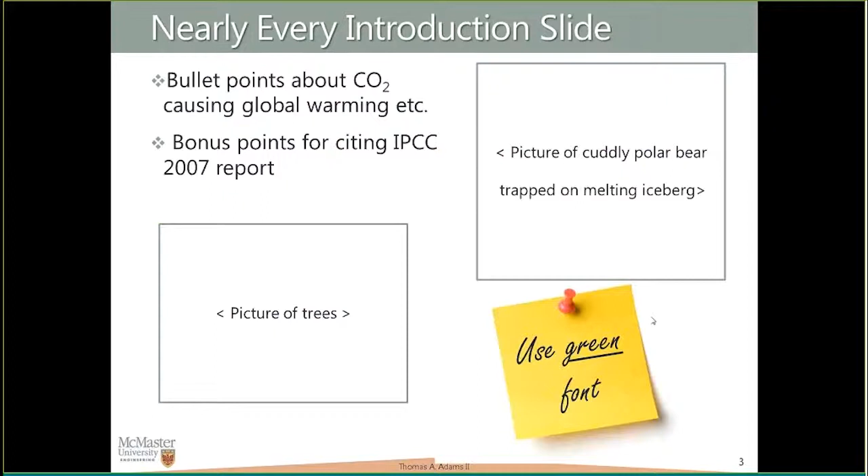Great. Okay, so I'll skip the about me slide and go on to my generic introduction slide. Nearly every introduction slide for a talk of this type has bullet points about CO2 causing global warming, pictures of cuddly polar bears, pictures of trees, that kind of thing, with bonus points for citing the Intergovernmental Panel on Climate Change reports. I'll skip this part because it's pretty well known, and move on to something more local in terms of motivation.

That's what I call the Toronto problem. This basically illustrates the major societal problem we have with clean energy: people want it, but they don't want to pay for it. Either it's too inconvenient or too expensive.

Here's an example. In the Greater Toronto Area, we're growing rapidly and we need power due to growth, and also due to the aging of our power fleets. People say if we're going to do anything new, it's got to be green, and we want green power anyway. We actually have legislation and regulations, and essentially all of our coal power in the province is slated to shut down in 2014.

It's almost 40% of Canada's coal supply that would be shut down as a result of this, if it happens. That's the plan. We're all paying a higher tax right now to cover that cost. And they say, instead of that, we're going to do wind power. So there's a push to get more wind in the province to replace this coal.

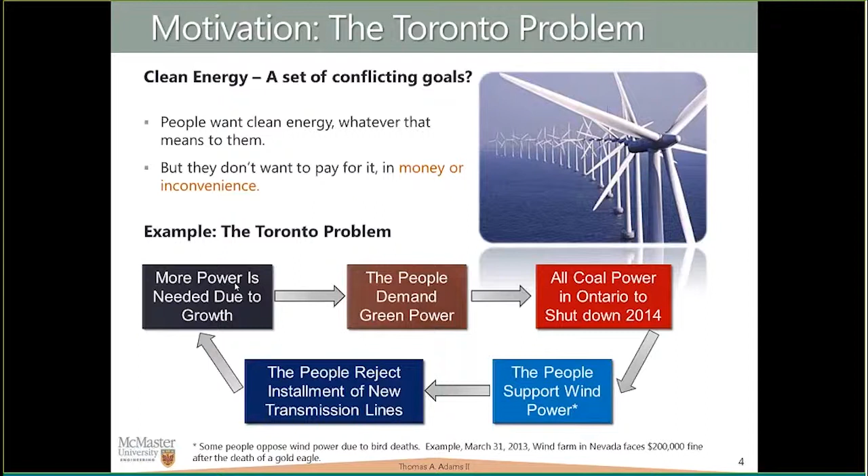But even though people supported the wind turbines themselves, they rejected the transmission lines, because for wind power you need lots and lots of transmission lines. If you've ever been around here, there are transmission lines everywhere and people are sick of looking at them. So we're actually right back to where we started, with nothing to go on in terms of growth. This is just a great example of the problems we're facing.

We put this in the context of what we call the triple bottom line of sustainability. In my group, we try to look at the energy crisis from a systems perspective in the context of the triple bottom line of sustainability.

That means we want things to be sustainable in the sense that it's affordable, so it fits in the economics category, which includes job creation, profitability, uncertainty, and risk. It also actually has to be environmentally friendly in quantifiable ways: particulates, land use, water, and of course global warming and smog and that sort of stuff.

The third aspect is society, which is equally important, if not more important, to getting something actually done: basically public acceptance, NIMBYs—not in my backyard—people that support something but just not where they are, and that sort of thing. So it has to fit in: it has to make sense from a business perspective, it has to actually be environmentally friendly, and people have to be okay with it. And that's a real problem.

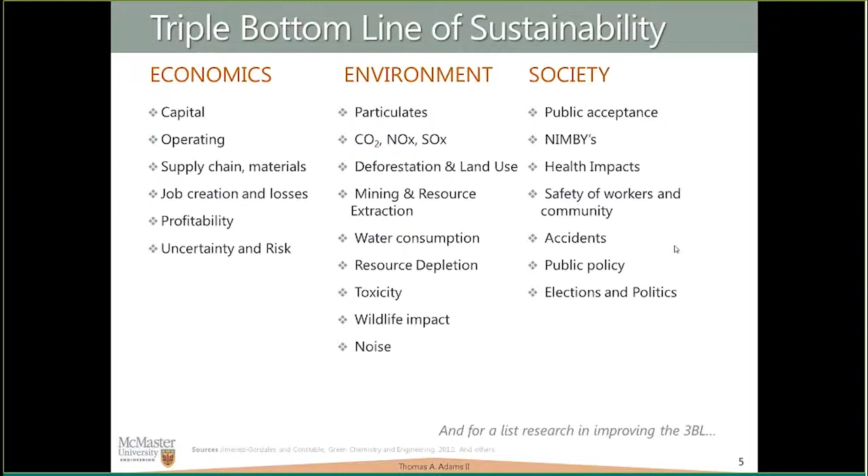Fundamentally, this presentation is going to talk about certain enabling technologies—technologies that I think are going to really change the way we do things from an energy systems perspective. These are technologies that enable new things we're not doing right now, and how that is going to help us solve this problem, satisfying all three tiers.

So the first technology I'm going to talk about is solid oxide fuel cells. For those of you not familiar, this is not like a fuel cell you're used to thinking about for a car or something like that. It's a very different kind of fuel cell.

Essentially, you have fuel going into an anode, and this can be quite a large number of fuels: syngas, hydrogen, methane, natural gas, all that stuff. And then we have air in the cathode. Basically, the way this works is that they're separated by a solid oxide electrolyte conductor.

So basically you have oxygen ions, and you have a free electron coming through your cycle, through your system. It basically hits the oxygen in the air, and that splits into oxygen ions. And these are conducted through. It's solid state, so it's more like electrons in a wire than it is diffusion, right?

So what ends up happening is the oxygen passes through, but none of the other materials goes in either direction, if it's properly made. And then when this reacts with our fuel, depending on the kind of fuel, you get your waste product, and the electrons are released. But now they have a higher energy potential. So that's basically the energy content now is in that electron, that goes to your load, and that drives your circuit.

One of the reasons these are special, I mean, that's a different way of a fuel cell working, but there's some key characteristics which really make it an enabling technology. So one, it's potentially up to high pressure, so these are in development up to 10 to 20 bar. It itself is about 50 to 60% efficient, which is good, but that's just one part of a system, so that's even better when you think of it that way.

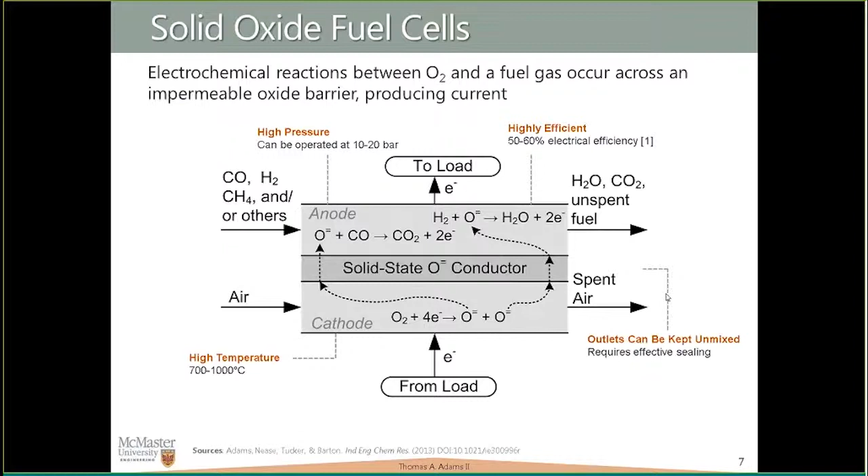So here's an example of, sort of a long-term, maybe 20 or 30 years down the road, way of doing bulk power from natural gas. Instead of combustion, we're going to use like an SOFC system. So these would be banks of stacks of cells, many cells. Your natural gas comes in your anode side, air goes in your cathode side.

And what's interesting is, depending on how you do this, 50 to 80% of the fuel gets used. What you're left with is your exhaust product, which is CO2 and water, and then your unspent fuel. So then you can do an oxidation step, which would require air separation or some other means. But the higher you go here in your fuel utilization, the lower you need here. But essentially, you complete the fuel for heat, and what you're left with is just water and CO2.

So you can recover this waste heat in the heat exchanger network. Here I'm showing municipal hot water, but it's hot enough you can use steam generation for more power if you want. And then the CO2 and water is relatively easy to separate, you can just use condensation in flash drums to get the CO2 out and the water out separately. Your airstream never mixes, so nitrogen never gets in and mixes with your carbon, and that makes it way, way easier to handle from a CO2 perspective.

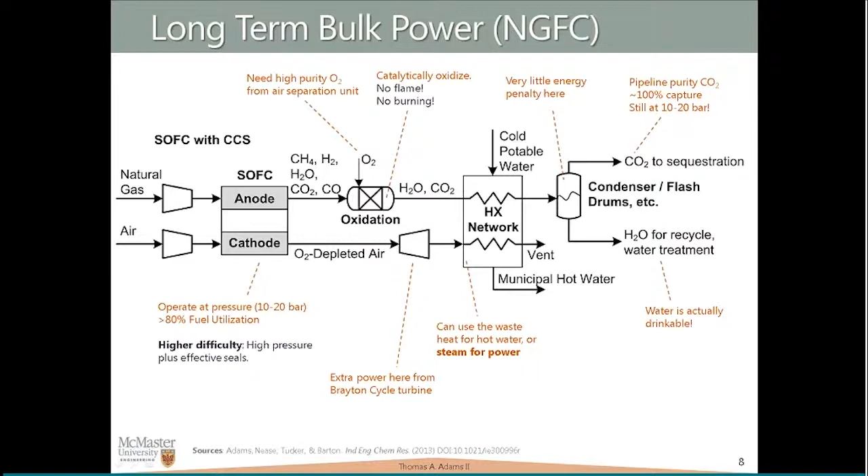So some of the key things here: very little energy penalty for doing the CO2 separation. You can get CO2 at about 100% capture at high pressure. The water you get is actually drinkable, there are people I've talked to that have drunk it. I wouldn't do it personally, but on the space shuttle they used a fuel cell, at least at one time, to produce water and energy at the same time. And you get extra power from your waste heat, so there's all sorts of places you can produce electricity. A lot of interesting advantages here.

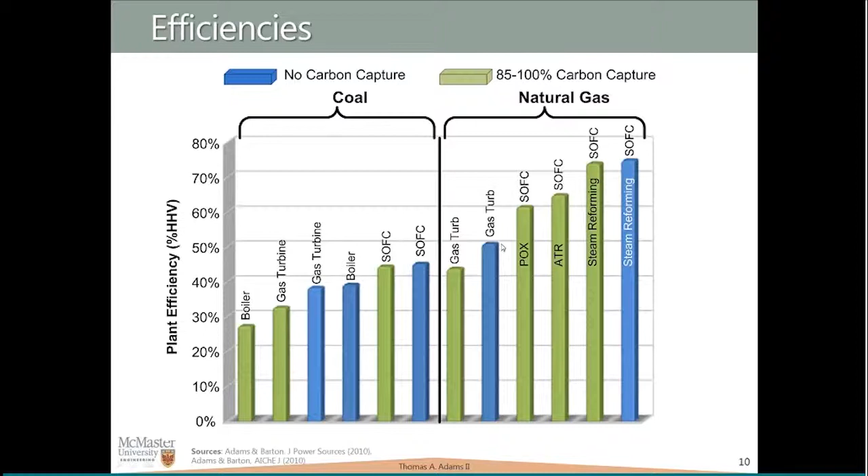On the natural gas side, here's your natural gas combined cycle, and these are different forms of reforming—I mentioned we looked at different types. But all the way up to looking at 73, 74% efficiency. That is phenomenal. The state of the art is about 50%. So that's some really incredible results from the efficiency perspective.

From CO2, here we're looking at CO2 emissions in megatons per year for a 700 megawatt plant. Here's your pulverized coal—when you add capture, even if you get 90% capture, your emissions only reduce by 80%. That's because you need additional coal to make up for the parasitic power required to do the capture. So even if you capture 90%, you have to burn more coal just to account for that.

But with your fuel cell system, even without capture, it's still 15–20% better just from the efficiency, and we can go down to basically zero emissions. Same thing for gas as well. So that's what's really, really neat.

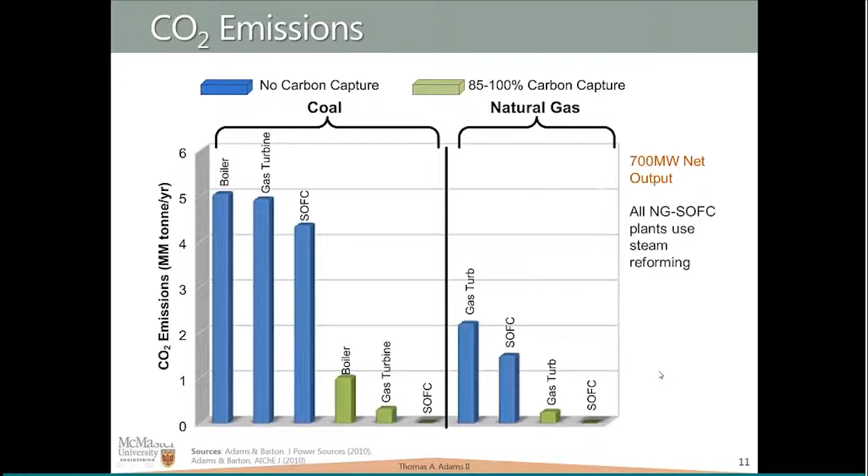There's a lot more to the environment than just global warming that we need to consider. Because we're capturing water at high purity, we actually have a net water production when we do carbon capture, since we capture water as a product and it's ultra high purity. When the systems are designed, you look at the impurities, and they're basically the same as on a bottle of Dasani's—I kept that on my desk as comparison when I was doing these studies.

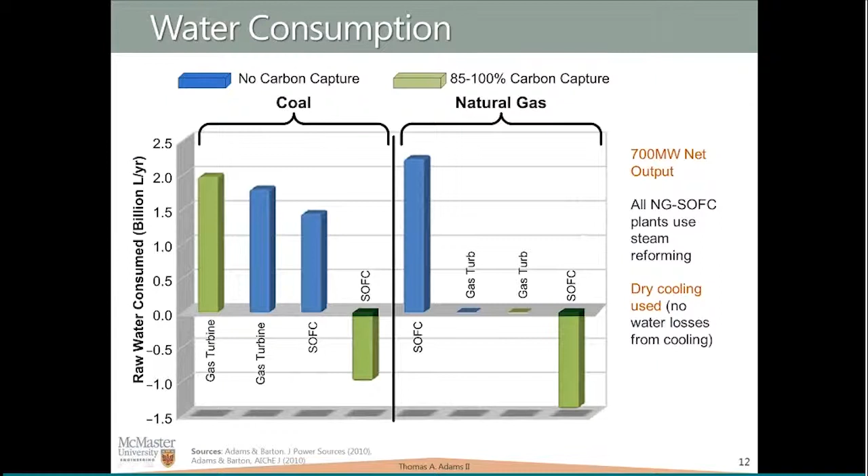In this case we're using dry cooling, so there's more water consumption if we're using wet cooling. We have the potential though to actually produce water from our fuel, without any significant additional effort in this case.

From a systems perspective, we're starting to look at some advanced integrated systems. One problem with the fuel cell-based system is it's basically a steady-state system, and some people are working on getting them to work in a load-following setting, but for the most part they're intended for steady-state baseline use.

So what we're trying to do is integrate energy storage so we can make it follow peaks and troughs during an actual power demand cycle.

We're looking at compressed air energy storage. This is the idea where you take air, and when you have extra power than you need, you compress it and store it in the ground, then pull it back out as needed to spin turbines and generate additional power. It's really fast—7 to 10 minute startup—so you can match real-time loads very closely with this system.

It's nice—a couple are in operation. There's one more that was just announced last month to be constructed in Texas. So this is up and coming.

What's interesting is for the SOFC, the reason we've chosen this is because we already have compressed air—spent air—as a waste product. So this is what we're going to store. Instead of taking fresh air and extra power to compress it, we can use our already compressed air as a waste product. We need some additional power to compress it higher, but most of the work's already been done.

And that's really, really nice because that's an extra layer of synergy between the two.

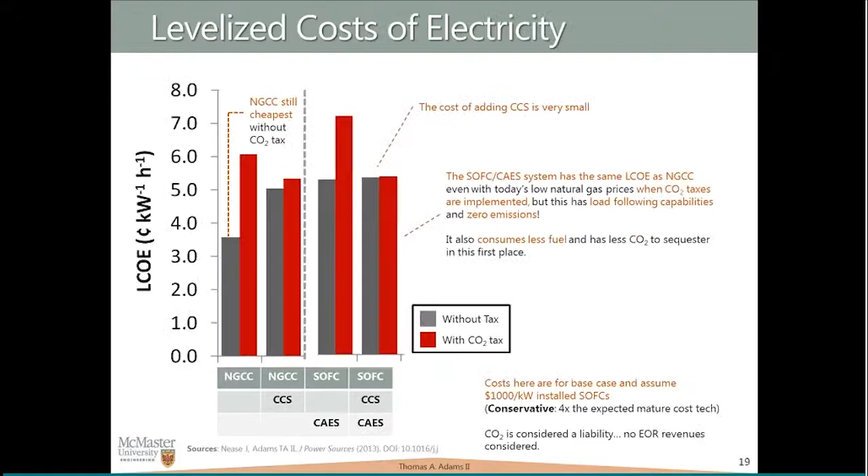So you have to refresh my memory - the molten carbonate uses the CO3 2- as the ion carrier, correct? Correct. So right now Fuel Cell Energy is probably the leader in producing those commercially, if I'm correct. That is correct. This study with the SOFCs was actually born in working with Fuel Cell Energy on the SOFCs, and I won't speak for them, but one of the main issues is that overall the system for the molten carbonate isn't looking like it's going to be competitive with the SOFCs in the long run.

And, oh man, I cannot remember the systems perspective, but I don't remember the molten carbonate having the ability to do this CO2-water separation on any of the same level. So I'm going to have to leave it at that because I can't remember the molten carbonate system.

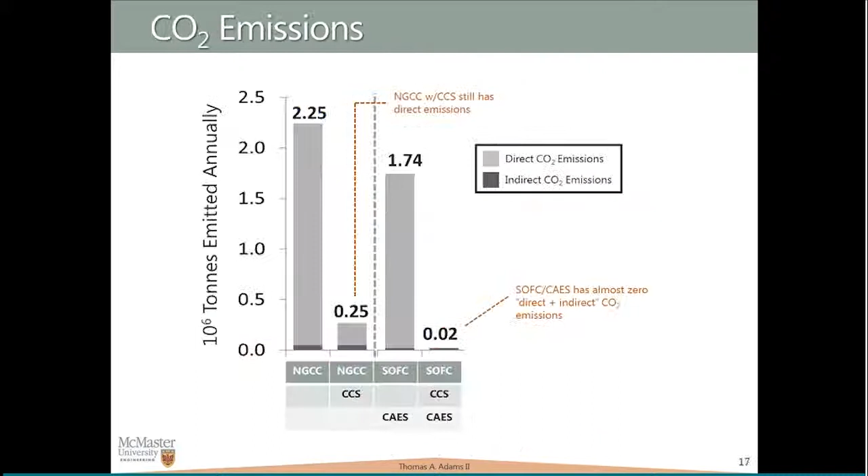Okay, that's fine - just that in addition to the US, where Fuel Cell Energy is the lead, Japan actually did a demonstration looking at that with the molten carbonate. Yeah, and actually I visited one of their fuel cell energy installations here in Canada - they have one just down the road in North York, outside Toronto. One of the issues was that the expense was so much they don't even turn it on, because it costs more to run it than the power you get from it. So I don't want to poo-poo that technology, but the people making it are pushing their money into SOFCs instead. So that's what I'm going with. I was just curious if you looked at that.

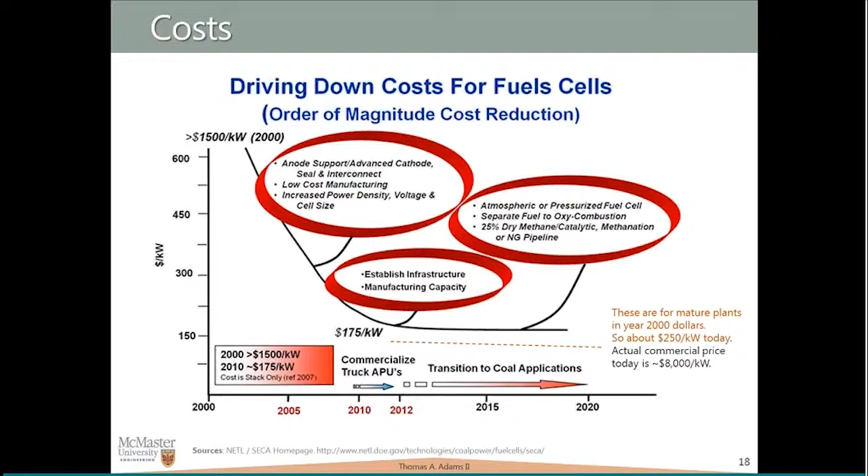So yeah, we've done similar analysis with the solid oxide fuel cells and come to some very similar results. Very interesting - great. I do apologize that I have to leave. Okay, thanks for joining, Jamie.

Okay, so again, I did look at molten carbonate - I'm trying to think, it was back in 2008, so I'm struggling to say anything. I'm being recorded, right? So I don't want to say anything wrong here.

Okay, so for polygeneration, this is the next section - more of an energy systems thing. This shows you more of the things you can do with the SOFCs, and we're going to talk about polygeneration. This is an idea where we take multiple fuels to make multiple products.

This term is sort of uncontrolled, so people will have a different definition than I do. The idea is maybe I want to do more than just natural gas, that maybe there's some kind of synergy with natural gas and biomass together, or with coal, or in some combination.

Maybe it's better to make multiple products instead of just one, and there's a lot of different reasons for that. One is just synergy exploitation - you can imagine something that's endothermic can get its heat from a waste stream that's exothermic in a different process, like a very basic level.

The other area would be in agile production. This is a very new, bleeding edge research area - the idea that you design your chemical plants to be agile so they can change what they make in response to markets. That could mean maybe you change your fuels or you change your products. This could be hourly changes, daily changes, or seasonal changes, because the amount of money you can potentially make by responding to a market is so much, it's worth it to have the extra complexity.

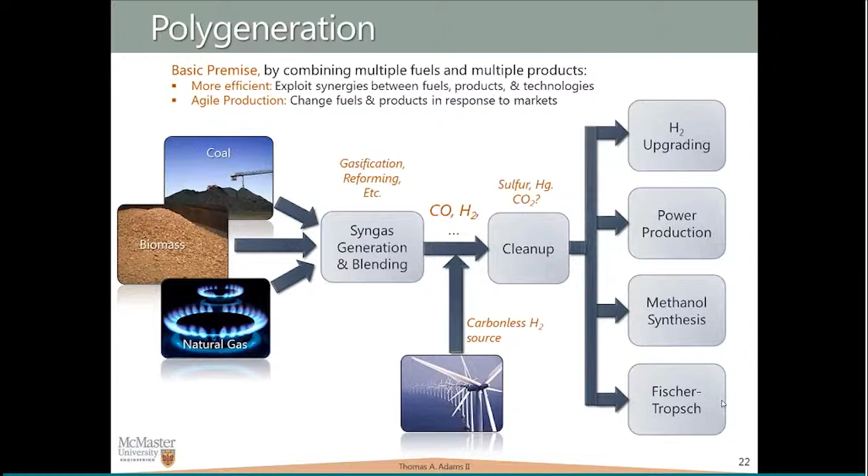So this is why it's an attractive approach. Here's an example using coal and gas to make liquid fuels and electricity. Here we have coal, or you could use biomass and blend biomass - it depends on how your gasifier is set up.

Basically, we're going to use coal to make syngas with a low hydrogen content, and then we use natural gas to make syngas through reforming with a high hydrogen content. This has an H2 to CO ratio of 3, this one has one of about 1, but we need a ratio of about 2 to do anything for transportation fuels - it's typically the sweet spot.

So we make methanol and dimethyl ether and all the methanol-based products, diesel, gasoline for example. We just blend the hydrogen lean with the hydrogen rich in just the right amounts to get the blend we need.

What we're doing with this process is we take this syngas and we would like to be able to change how much goes toward liquid fuels and how much goes toward electricity. So this is our electricity train, and we'd like to do that daily if possible.

Maybe switch between a day mode where I make lots of electricity and a night mode where I make lots of liquid fuels. There's a lot of different ways we can do that, and we'd like to be able to blend this and have that sort of flexibility - maybe change how much methanol and diesel and gasoline we make.

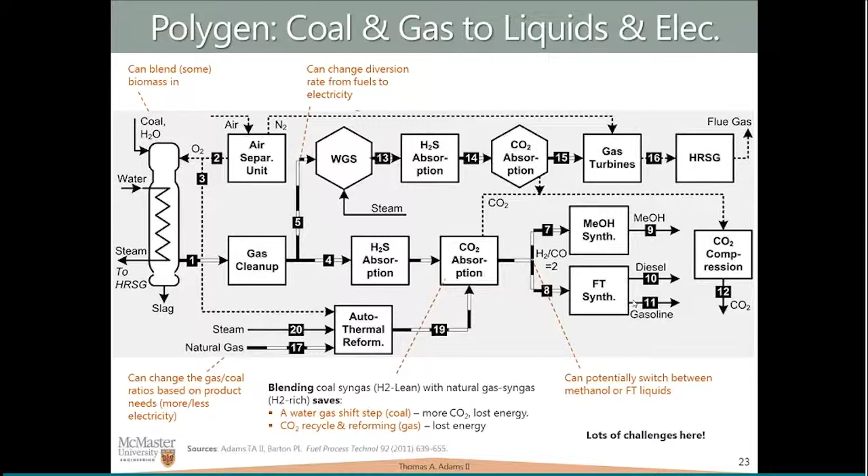We had some prior studies I did with a student at MIT, and we basically quantified that if you can do something like this in the petrochemicals industry, and you can just add a little flexibility and respond to market conditions, you're looking at $1 billion in net present value increase - essentially real profits over the lifetime of your plant. And that's just from meeting market demand and nothing else. So that's the kind of potential we're talking about.

But what's nice is even this you can improve with the SOFCs. So instead of using gas turbines to produce electricity like syngas turbines, we can use fuel cells because you can use syngas in a fuel cell, the SOFCs.

We do this where we keep our air and our fuel separate because we can do that with SOFCs, but we can capture basically 100% of the CO2 rather easily in this train and compress it. So our electricity train we can make CO2 free, and we still have this sort of purge gases from our methanol and Fischer-Tropsch synthesis, because you're never going to get it all.

You're going to have some extra nitrogen, that kind of thing. So right now combustion is typical. We'd like to replace that by just moving that to our SOFC because these are fuel flexible.

Okay, so what we're looking at is a system where all the carbon, so these fancy streams are carbonaceous, right? The carbon has nowhere to go, basically, but in the ground when you do this. So you're looking at 100% carbon capture, making liquid fuels and power, and we want to be able to do this where we change this stream here, like how much we go this way or that way, to change our product mix. So right now, this is sort of an advanced thing we're working with the DOE. We're doing some studies on this section here. How far can we take it, kind of thing.

Okay, so it's really neat. So this, just from a systems perspective, the SOFC just lets you do so much cool stuff. Here's another example. So this is a different systems integration idea. It's the idea of using gas reforming as a cooling mechanism for coal gasification.

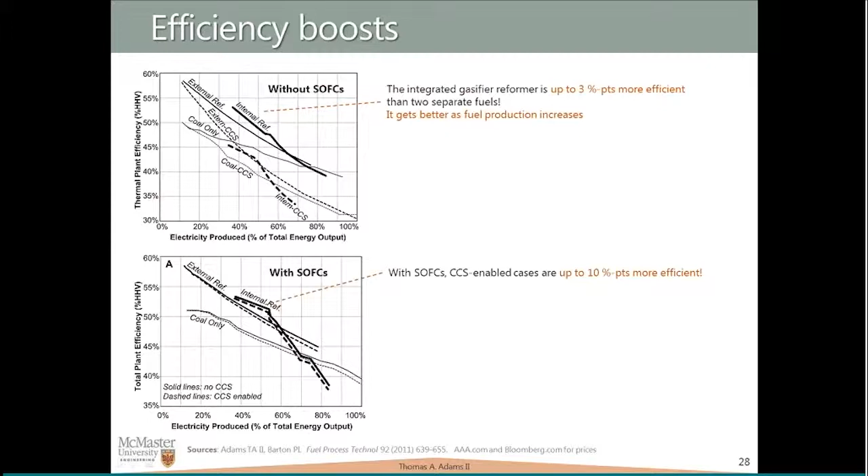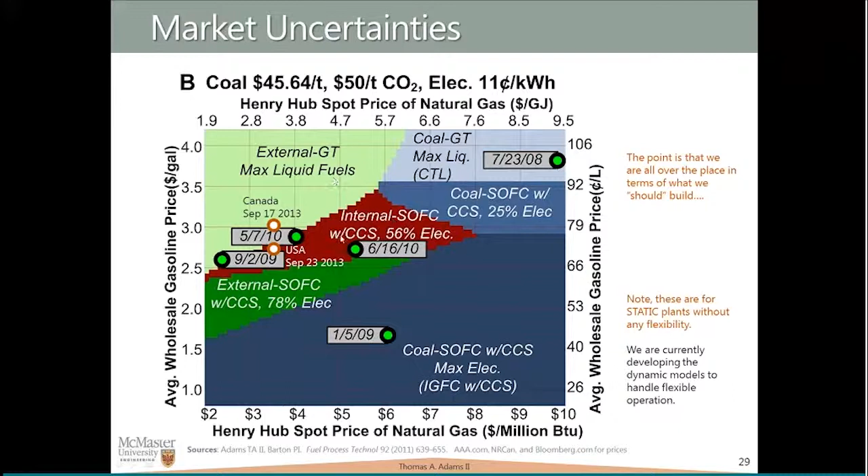Okay, so next I'm going to talk about another idea. We're starting to expand our horizons a little bit, looking at individual pieces of equipment that might be better, and looking at individual systems. Now we're looking at nuclear polygeneration, building on the coal and gas integration idea that's promising.

This idea was sent to me from someone formerly at General Atomics, who's working with a special type of nuclear reactor, a 4th generation one called a Modular Helium Reactor. Basically it's high temperature helium. High temperature heats the helium, which goes through a Brayton cycle, and that's pretty classic from our perspective as chemical engineers.

What we're looking to do is make liquid fuels out of coal, gas, and nuclear energy. One way to do this is to use that high temperature heat generated by the nuclear reaction, not for electricity generation, but to drive natural gas reforming. This isn't totally new, because people have been looking at nuclear heat to make hydrogen through this route. We're just not making hydrogen completely - we're making hydrogen-rich syngas, just the first step, and then integrating it into a system. This isn't that crazy, because people have been looking at this for 20 or 30 years.

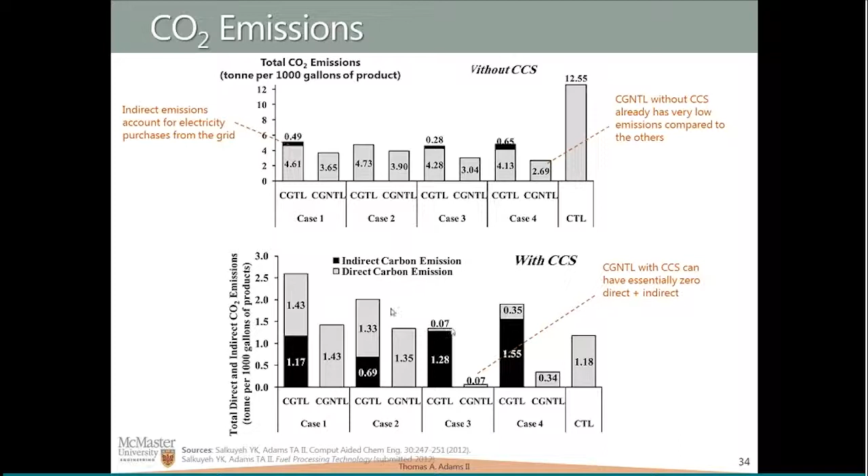The indirect emissions are purchased off the grid, so you have to account for those. But where you can really see what happens is in the carbon efficiency - the percentage of carbon atoms in the feed that end up in the product.

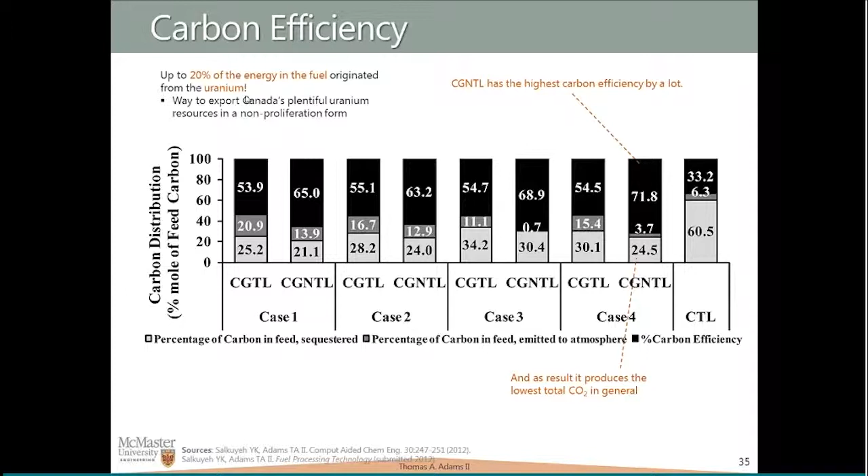What we're really doing is inventing a way to export nuclear energy in a non-proliferation form. There's one mine in Saskatchewan that has, I think, 250 or 300 years worth of uranium at our current rates - it's incredible. So we're finding a way to take that energy and sell it as just diesel or gasoline, which we can definitely do across borders. That's not a problem. Up to 20% of that energy in the diesel and gasoline came from the uranium, so it's a major contribution, and a way to use our resources differently that gets around that sensitive issue of proliferation. There's a lot of really cool stuff that can come out of it.

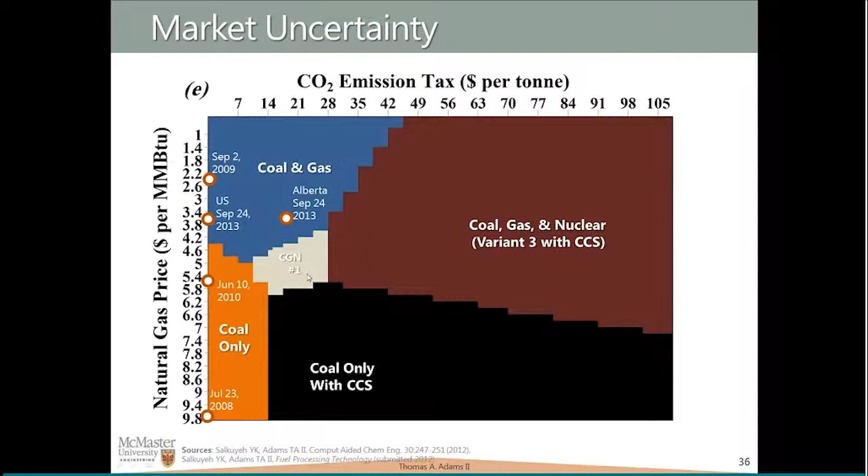And again, we're looking at market uncertainty - here we have gas price and CO2. Here we are in Alberta right now, U.S. over here. There's a carbon tax in Alberta, so the optimal here is a coal and gas to liquid system. This is coal, gas, and nuclear design number 1, and this is a different variant. So we're actually really close to that line once it starts. This is just pure economics - forget about environment, just pure economics. So even from that perspective, there's good reasons to do it.

Okay, so I'm going to finish up pretty soon. I'll just close with chemical looping - this is another major technology that's up and coming, and it enables all sorts of stuff. It's sort of a direct competitor with the solid oxide fuel cell, in the sense that they both try to do the same thing, where they take your fuel and want to basically oxidize it without nitrogen.

So what they do is, instead of air, they use nickel oxide, or some metal oxide - in this case I'm looking at nickel. The nickel oxide reacts with, in this case, methane, and we get water, CO2, lots of heat. So our heat is released, and the energy goes into the hot exhaust here, and also into the hot nickel. This means our CO2 and water are really easy to separate - that part's easy. Then the second section is our nickel gets oxidized in the air, that produces more heat, and we basically get this high pressure, high temperature depleted air that powers some turbines, with steam heat recovery in our plant. So this is a way of doing easy CO2 capture - it's an enabling technology, and there's many variants of this.

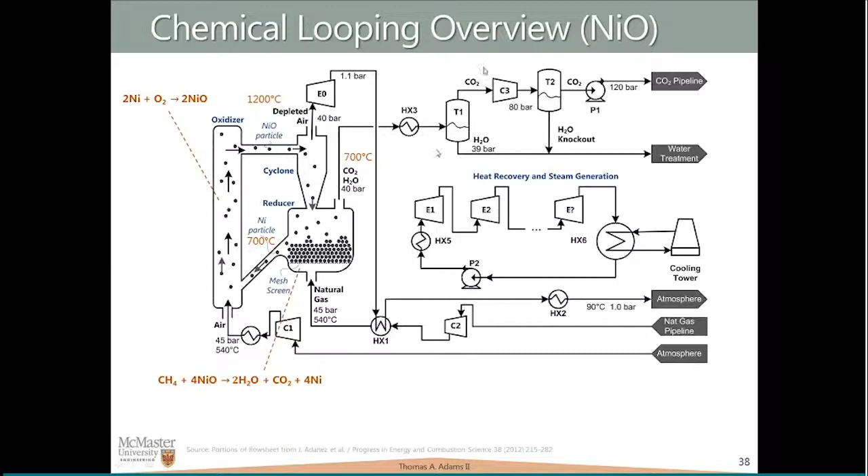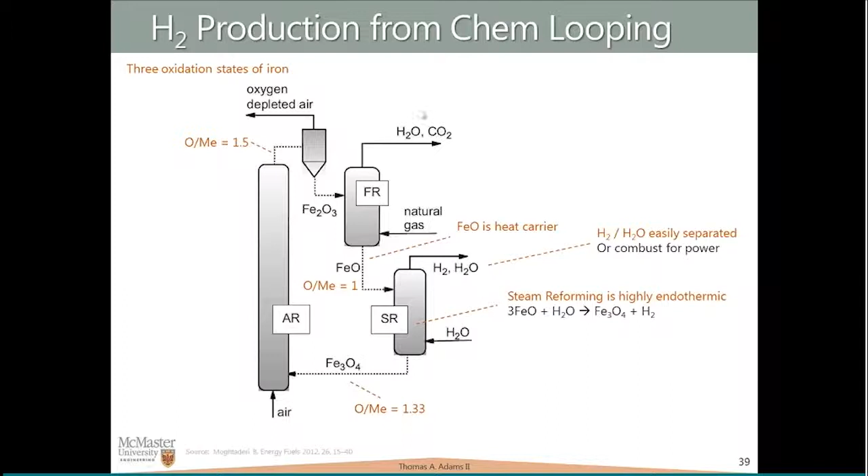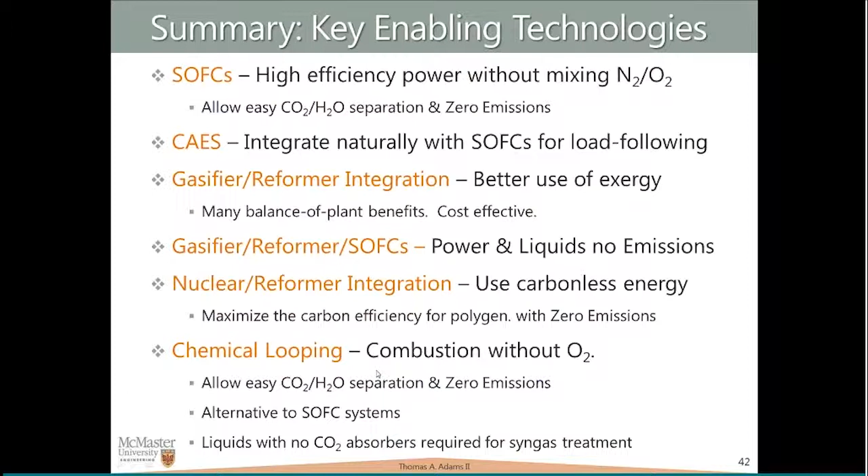So this is ongoing work, but it's an example of how that enables some really interesting systems. I'll end it there, basically showing the different techs that I think are really going to change things. We have fuel cells as one of them, compressed air storage, and many kinds of energy storage are interesting. In this case we're just doing compressed air, but integrating different major techs like gasification, reforming, and fuel cells. Nuclear energy could play a huge part, and then this chemical looping opens up another whole area of systems we could possibly do.

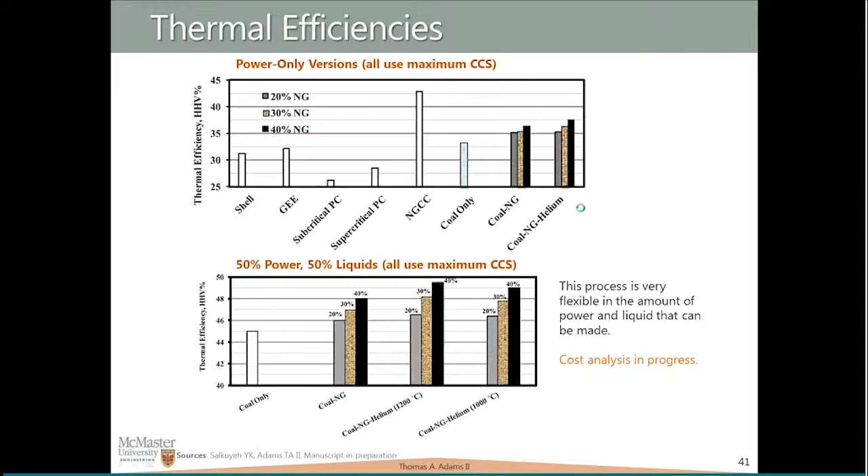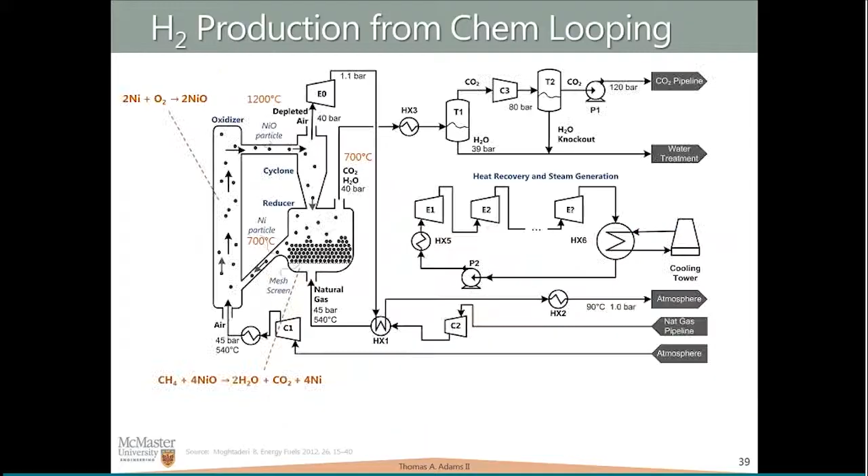Okay, I think I can answer your question succinctly. So for this example, this would be a steady state at this point. So what we're looking at right now is just the steady state, and for this particular example here, these are individual steady state processes that we design ahead of time. We haven't looked at the dynamics for this particular system of how we switch between them—that's the next step. Some of our other systems, like the modular helium, the coal gas, nuclear, those are all steady state systems that we're doing right now. And when they look good enough, then we look at the dynamics.

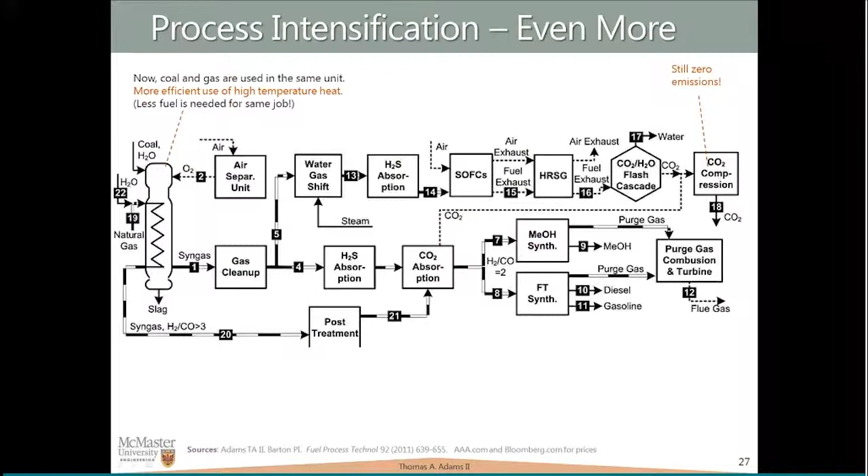So here, for the coal and gas integration, we actually have an entire research program with Imperial Oil right now on the dynamics. We're building dynamic models because we're very interested in doing this dynamically, like how long it takes to transition between different steady states. So we are building dynamic models for this section, which is not easy, because gasification is an art form more than a science in many ways.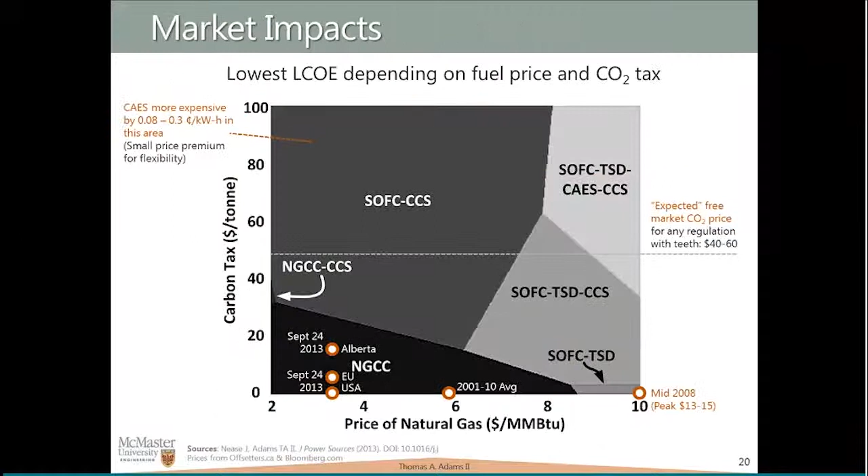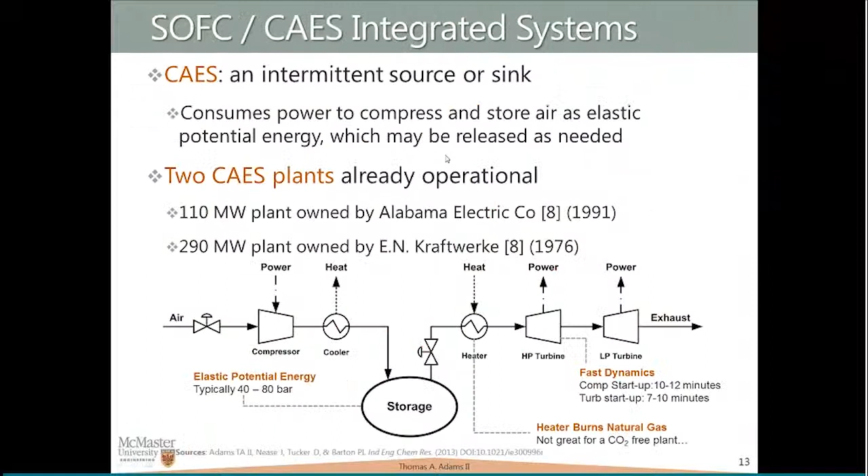And then for the fuel cells, these are all steady state at the moment. But what we're doing is we have a pseudo-steady state for this sort of thing. So we have these 1-hour time intervals, and we're breaking this down a little bit. We do this for the entire year because the transition for this particular case is really fast. So when you have a system like this, all of it is actually steady state all the time, all base load, so we only need to do one model for this. The storage part is the dynamic part, but it's so fast, taking 10 minutes just to start from 0, but just to tweak up or down with the load is quick. So this is really, really fast, so we're not concerned about that.

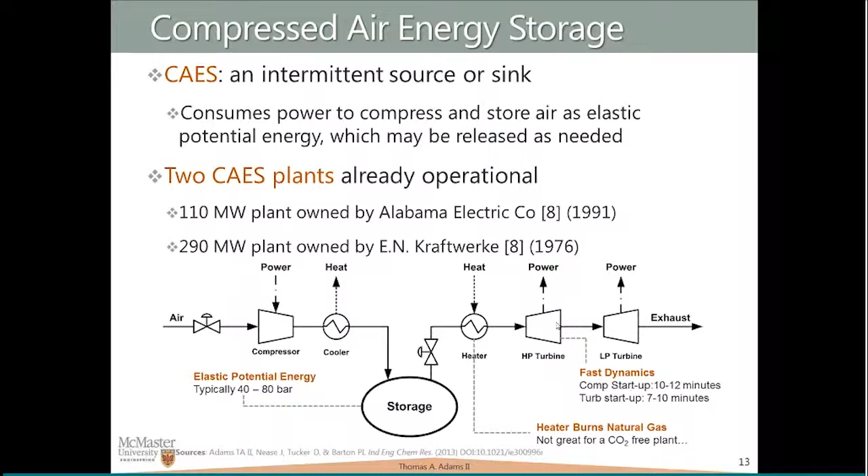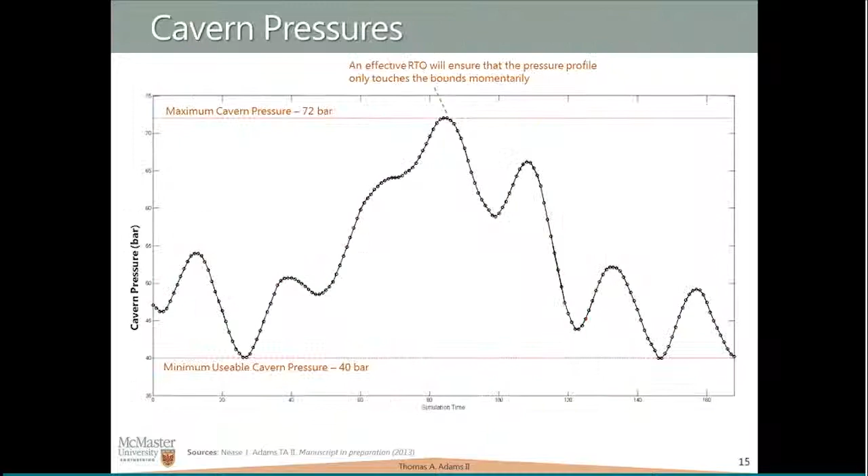What else? There was one more. Oh yeah, so for the last one, we were talking about with the Department of Energy, we have this—oh shoot, which one is it? We're looking at, I'll bring it up, it's in the next section here. This one, where we're using dynamically changing our electricity and our fuel gas amount.

So this purge gas also changes with time, so we have two streams coming together. We're doing this experimentally—it's called the hardware-in-the-loop system. Parts of it are experimental, like the air compressors, turbines, and combustors, and parts of it are models, like the SOFC model, which is dynamic. The reason is we don't want to break an actual SOFC, so we use a model and keep breaking that model over and over to see if it'll work. So the answer is we do both—we're trying to do everything, and we'll never do everything, but different parts.

Okay, thanks. Okay, great, thanks Jose. Okay, any other questions? Be sure you unmute your microphone if you want to ask a question. I guess I have one question.

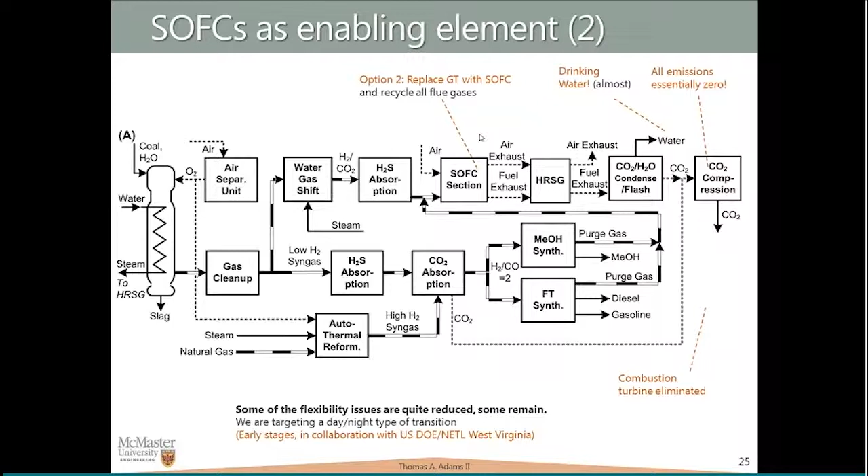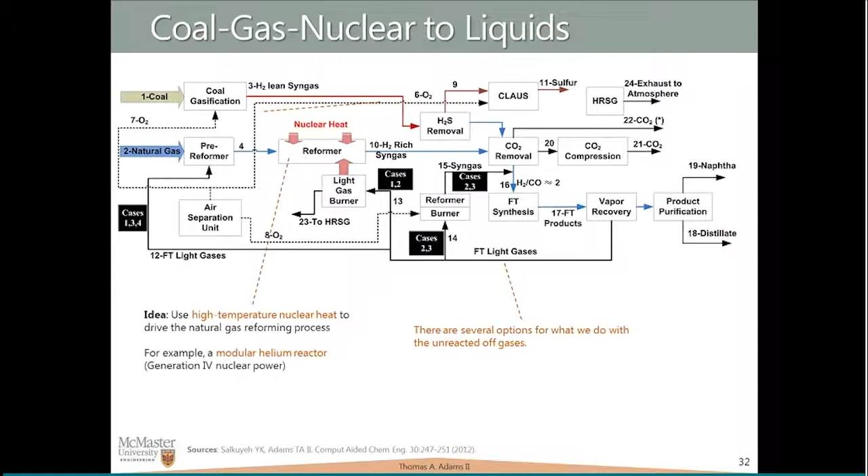The nuclear integration looks very interesting. If you had the nuclear plant close to the other facilities, are there any other opportunities for integration, perhaps with waste heat or other things? I guess you do need them close together, is that right? In this particular case, yeah, the nuclear plant would be next to the coal plant, because you're basically bringing in your gas from your gas plant and integrating with your nuclear plant. So these two would be close together.

The other integration, if you had heat integration between the two, you could. All of our designs have their own internally optimized heat network. But yeah, there's other potential here. However, this is already stretching it in terms of what people want to do with nuclear. Nuclear is not something you can innovate in very quickly—it takes a long time for people to accept things. So we're going to stick with this one thing and see if it catches on before we move on to any other integration that way.

Okay, so just initially you're proposing just the energy integration, but there may be other opportunities. Yeah, and there always are—there's so much going on with these plants. Every heat exchanger is an opportunity for something. Yeah, that's right. Okay, great. Any other questions?

Okay, well, if no one else has more questions, I have a couple. Great, Jose, and I guess I can have a lot of questions, but this is very related to the work I'm doing with CHP optimization and planning, which I'm finishing up. So I did see in the beginning you mentioned, as everybody does, uncertainty and risk.

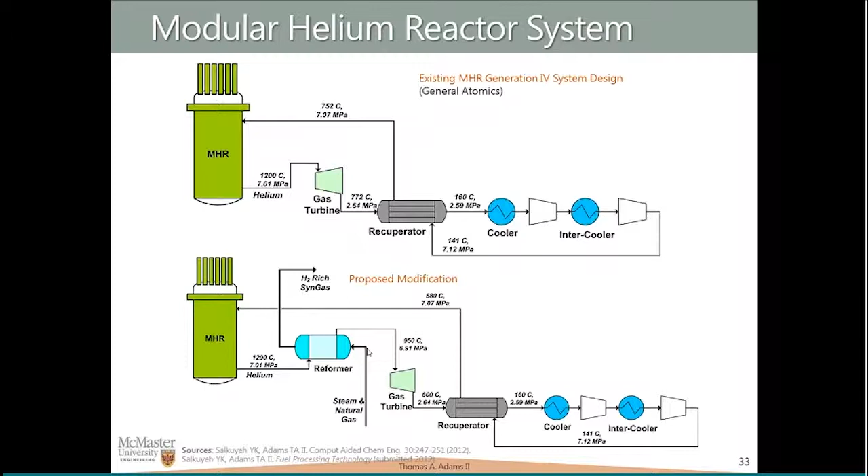What have you done to quantify the uncertainty and apply it into the optimization, or have you done any of that? Okay, the connection's not so good—let me reiterate the question to make sure I understand. You're asking how I handled uncertainty in the real-time optimization, is that correct? Right, right. So you're talking specifically about the uncertainty in the predictions of price and demand for the fuel cell system, right? Right, right, I guess that's one of your stochastic variables that you input into your model.

So what we did—or I should say my student did, because I didn't do it—is every hour we get a new profile for the next 24 hours. So we went back and resimulated this over and over, like a Monte Carlo analysis, saying okay, this is the profile we get, and making sure that if we get a slight deviation—these are all deviations from our mean, so this is our real profile—and based on historical data, we know we got about 6% uncertainty range, standard deviation kind of thing. So we can go back and rerun this over and over with different instantiations of that uncertainty from the real profile. What that shows is that if we're erroneous, that error grows with time—it's quite good in the next hour, for example, but that's the maximum.

So we do this over and over again, and based on that we can determine performance, and plot how well we match and our profit as a function of how good our predictions are. Even when the predictions are not that great, it still works really well. This manuscript has been submitted, so hopefully you'll see those details soon.

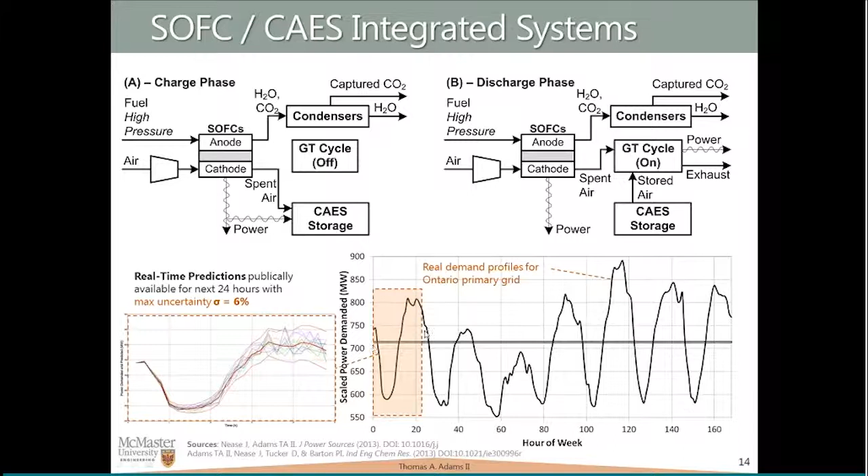We looked at it from both a performance perspective and a profit perspective, and it's really interesting. If you do the load following, you can get really good load following matching, but if you optimize for profit, you get something completely different—you don't care at all about matching, you just try to make more money. So you get completely different results doing that, and it's interesting to see how that plays out.